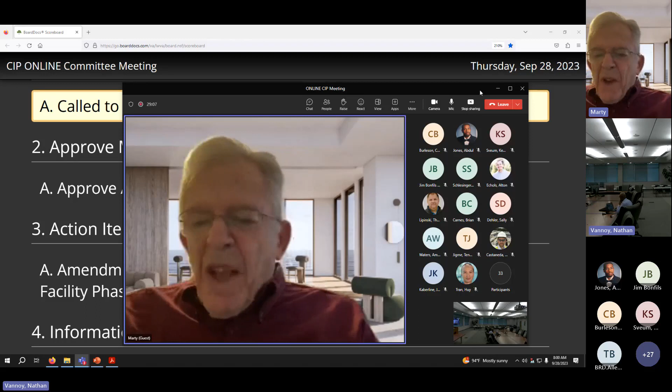The Loudoun Water Board is meeting today by electronic means pursuant to Virginia Code Paragraph 2.2-3708.2A3. Public notice and meeting access information was provided on the Loudoun Water website. A recording of the meeting is available from the board secretary. Future meetings will be in person unless indicated otherwise in the public notice. Board members wishing to speak are reminded to press unmute and identify themselves by name so that staff can accurately capture comments. The board secretary will now take a roll call attendance of the members.

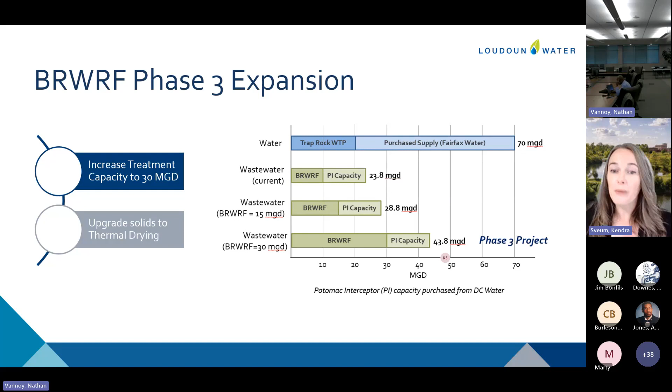But also with this work, we made the decision to advance our solids treatment on site and upgrade to thermal drying. This is going to produce a higher quality biosolids product from Broad Run. It will reduce the quantity of biosolids that leave the facility, and will help prepare us for future regulations that may come.

In terms of scale, this is large work. It's more area than we originally disturbed to build the plant, so it's still a major undertaking. The work on this first construction package was approved by the board early last year and is already working through design.

So construction package 2 is our most time critical package. This is to come in and to increase our solids treatment capacity, both in our secondary treatment and our biosolids. And that's what we're going to be talking about starting the design for today.

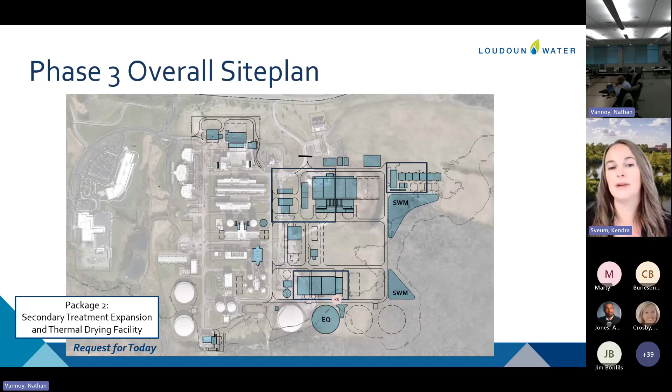The last part of the overall phase 3 expansion will be our construction package 3, which moves back to the existing part of the plant in light blue and will expand overall treatment capacity to 20 MGD. Then the fourth treatment package comes back, does much more heavy infrastructure to get the overall site up to 30.

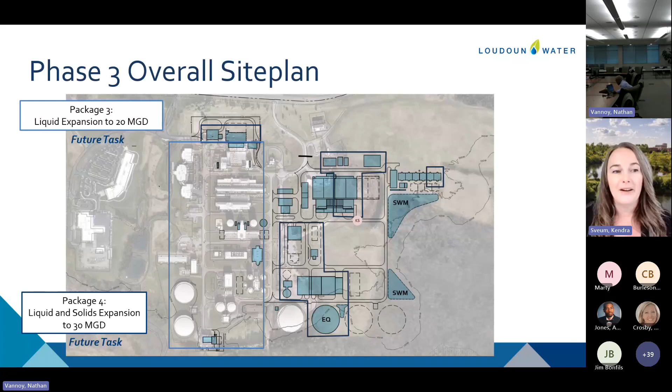When we look at our program schedule overall, this work is going to take place over the next 10 years. And when we did our initial planning, we designed these construction packages to be individualized work in areas to optimize what was time critical and to be able to give us the ability to adapt moving forward if regulation changes come, if growth in the county might look differently in 2035 than it does now. It gives us the ability to adapt as we go along when we're making these large infrastructure changes.

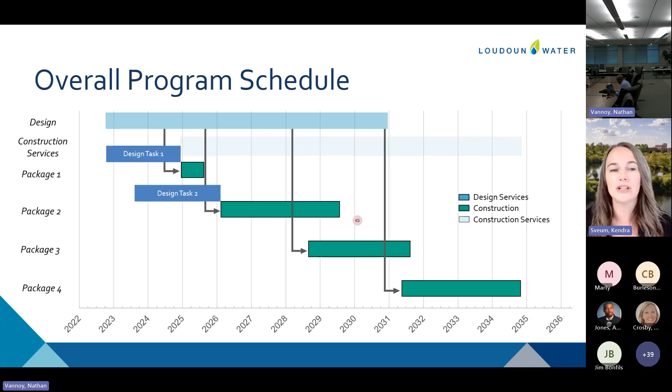So as we've mentioned before, the overall project budget is $650 million. This was developed as a parametric estimate. So that means we looked at a typical cost for 15 million gallons of membrane technology or a 30 MGD thermal drying facility. So it was really just a scaled cost to get us an overall target.

And we knew that with this cost, this is going to be one of the largest capital undertakings that Loudoun Water has completed. And so we put some strategies in place to help us manage this large budget, one of which was the phasing of these construction packages to help us adapt as we move forward and to be able to manage cost as the market changes.

We're also utilizing third-party cost estimators so that we have a verification of the cost estimates that are being prepared by our design engineer. We are also monitoring the metrics for similar projects within Loudoun Water, other large infrastructure like the Potomac Water Supply, but also within the industry. There's a lot of thermal drying facilities being built right now. So we can look at their project costs relative to ours to make sure that the spending is in line with what other utilities are seeing.

So an update on where we are in this large timeline. We completed the planning at the end of 2022 and brought forward to the board what we wanted the phase 3 expansion to be. At that time, we requested to start the design on the site work because we needed to get out there early to get the site prepped. But we also needed to complete a basis of design report so that we could get our first line item cost estimate. It was important to move forward from that parametric budget to a real cost estimate for what we want to build at Loudoun Water. And we've completed that and want to start talking about those results today.

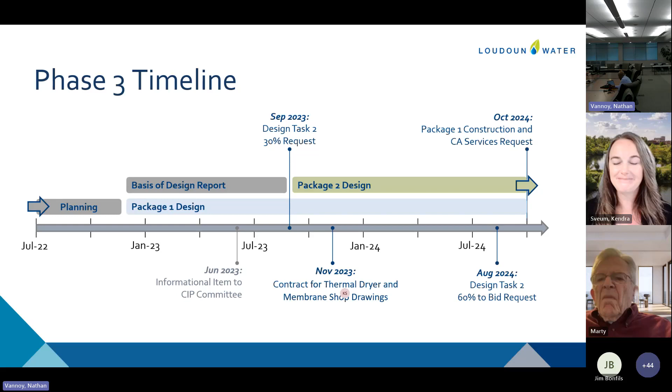So to move into the specific request today. I have a question. Yes. This may show my ignorance, I don't know. You're increasing thermal drying, but you're not increasing digestion capacity. Are they related or am I off base?

So absolutely. Don't have a process flow diagram to back up to, but that's okay. So what thermal drying does is it actually replaces the need to even digest the biosolids. We will still use our digesters, but we will use it only for primary sludge. Right now, we're using that digestion to meet our permit requirements. The thermal dryer will now do that.

And that was part of what we evaluated in the planning phase. We could have built more digesters and stayed at a Class B biosolids, but the ability to replace that treatment process with the thermal dryer and get a higher quality biosolids out of it really improved the cost benefit of what we were getting. So we aren't building more digesters because the thermal dryer replaces that need.

So those solids go directly to thermal drying and bypass the digestion? A portion of them will. We do still want to digest some of the solids because we want to get the biogas out of them, and we reuse that biogas as an energy source within the plant. So we're just strategic about it, and we just digest the solids that have the gas value in it.

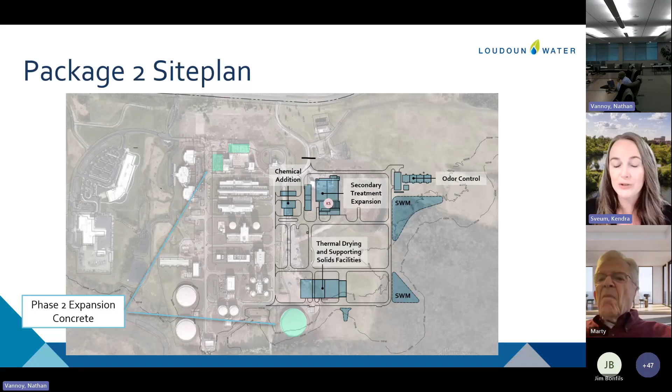So we feel like in pictures, it can sometimes be hard to grasp the scale of what we're talking about, but this is major infrastructure that we are going to be putting in, and very large buildings and structures, but it's the heart of treatment in Broad Run, and it's an important investment in getting more capacity on the site.

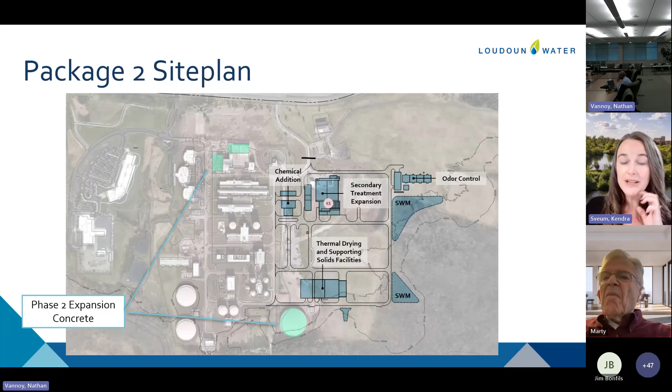So when we completed the BODR, we received our first real cost estimate on the package 2 construction. And this cost came in at a midpoint estimate of $384 million. Now, this is still a very early estimate for construction cost estimating. So we've shown the plus or minus that this estimate could range in, because things will continue to change as we move through design, and design will take about 2 years.

And I'm sure, as you are all aware, with the high level of market variability we're seeing right now, there is a lot of contingency built into this estimate about where escalation might go through our 2 years of design and 4 years of construction, and about where individual commodity pricing might be at the time we actually bid this.

So the wide range for this estimate is the project could come in between 300 million and 600 million, but we will continue to update this estimate as we move through design, which will take place in 2024 and 2025. It gives us the ability to continue to monitor the market.

We did do our third-party cost estimate on this number, and that third-party estimate did really verify that we are capturing some good safety factors, and the market volatility is accounted for well in this level of cost estimate with the range we're showing. So it's just going to be important that we all keep in mind our 300 to 600 range. This number will move around as time goes by.

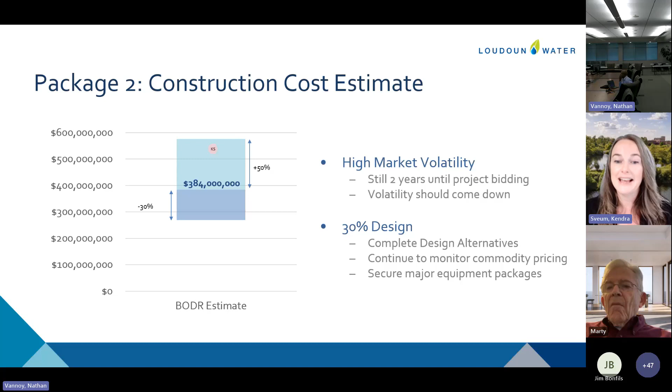So we anticipate a 9-month schedule to get through 30%. This is going to give us time to do a preliminary engineering report, which will complete those last alternatives that need to be evaluated and really finalize the scope of what we want in this package and what will be deferred into package 3 or 4. We will develop 30% design plans and specifications and begin the permitting process.

So the movement to a thermal dryer is going to require modifications to our current air permit, as well as our VPDES discharge permit. So we want to start that process early. We've got a good idea of what needs to be done. It just takes time to work through those processes. So starting this 30% design, getting everything nailed down, allows us to start permitting early, so that that doesn't delay the overall construction of the project.

So August 2024 is the general timeframe when we should be back, and we will then be asking for the amendment for the complete design once we've got the firm scope on this design package. So our fee for the consultant on the 30% is $5,945,000. That's broken down into project management, our preliminary engineering report, the design plans and specifications, and permitting.

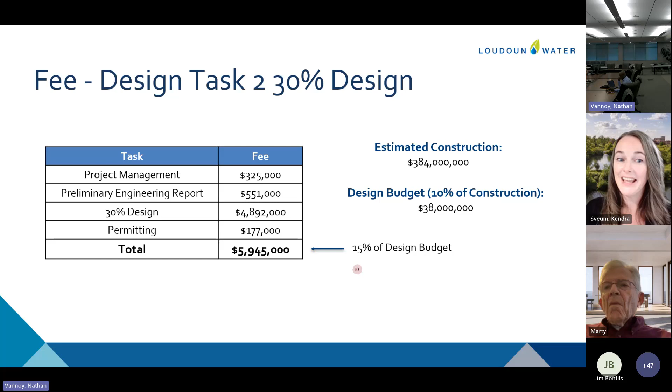And really at this point, we're going to start getting economies of scale because this design project is so large and we're building very large tanks. We will see some of these percentages come down over time as part of the design. So this is a very reasonable design fee for the level of what we're looking at. And what we're here to request today is the amendment for this fee. And so that moves me into the recommended motion today, unless there are any other questions.

Hi, this is Keith. I do have a question. When you mentioned the parametric cost estimation to determine a 650 million budget, could you just explain that a little bit more? I'm just trying to understand it. Is that primarily based on known facts and you're extrapolating those known facts? I was just curious, what are some of the key known drivers for that extrapolation? When we were developing that fee, we were in the planning stages.

And if I move back, just to give us a visual, because I like my visuals here. When we did our overall plan, we just knew that we needed 15 million gallons of BRBs and membranes. We didn't have drawings of it or a site plan. So we weren't able to go to a cost estimator and say, give me a line item cost estimate. So what we looked at that time was, well, we have our own BRBs and membranes. And we said, well, how much did it cost to build this 15 MGD of capacity?

So those costs came from 2008 and 2020. So we took those costs, we scaled them up to 2021 dollars at the time and got a parametric value and said, we spent so many million dollars per MGD of flow to get that. For the thermal drying facility, we didn't have a frame of reference because Loudoun Water's never done that. So our design engineer looked at similar size projects and said, well, there's a lot of thermal drying facilities in Georgia right now. So the last one built in Georgia, they spent X number of dollars per MGD of capacity, and we scaled it up like that. Because we didn't have enough detail on the design of the facilities to get any better estimate at that point.

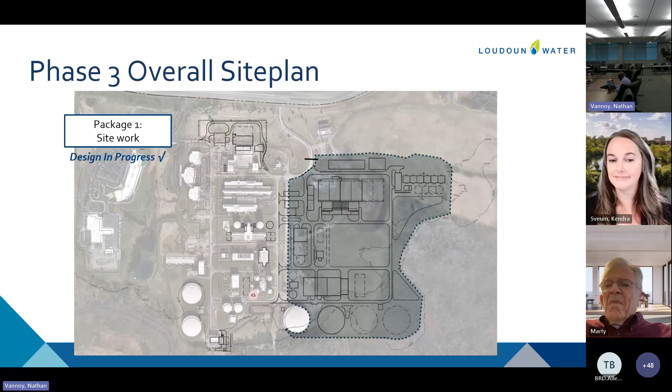And so one thing that I did want to mention, sorry, my mouse is very sensitive. There we go. On this overall budget, as we bid each of these construction packages, it gives us a chance to come back and update that budget. And really, that's our best time to see how the market is responding as we bid out. When we bid construction package 1, we can update the budget. When we get our bid on construction package 2, another good time to update the budget. And that's how we really plan to utilize these phased contracts to say, what is still in the budget? Does the budget need to be adjusted over time? We've got a good ability to monitor this as we move forward and make smart decisions versus just trying to move forward with the whole program at once. It would have been really difficult to try to manage costs.

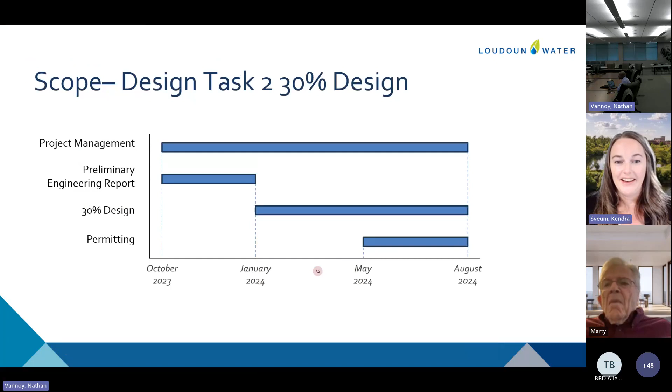Whoops, I busted out of the presentation, sorry.

All right, so at this time, we have the recommended motion for this amendment. I'll read the recommended motion, but I think we need a discussion after I read it to see whether we want to go consent or action. I move the board authorize the general manager to execute an amendment to the professional services contract with Hazen and Sawyer for the Broad Run Water Reclamation Facility Phase 3 expansion project for design task 2, 30% design, with an estimated not to exceed cost of

$5,945,000 and authorize an approximate 5% contingency to be controlled by the general manager for a total authorized budget not to exceed $6,242,000. Additional costs will require board approval. Can I get a second? Yeah, this is Keith. I'll give a second. Why don't we vote on this and then we can discuss whether to go consent or action. Jewel, can you have a roll call?

Yes, sir. Mr. Sultan? Yes. Mr. Bonfils? Yes. Thank you. Mr. Moody? Yes. And Ms. Sirsikar? Yes. Thank you. Now, do we have any comments from committee members on whether to go action or consent? I would like to propose that we put this on an action item. So I think the board needs to discuss this further.

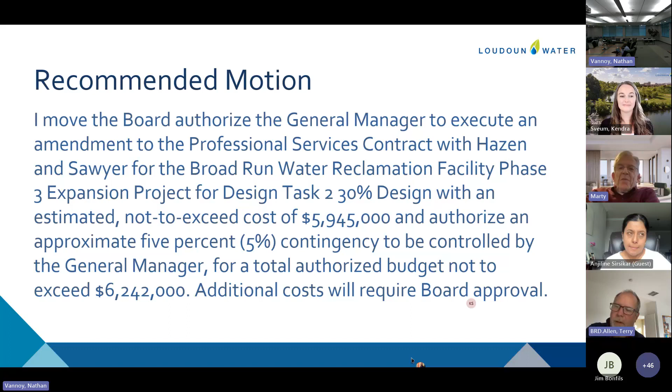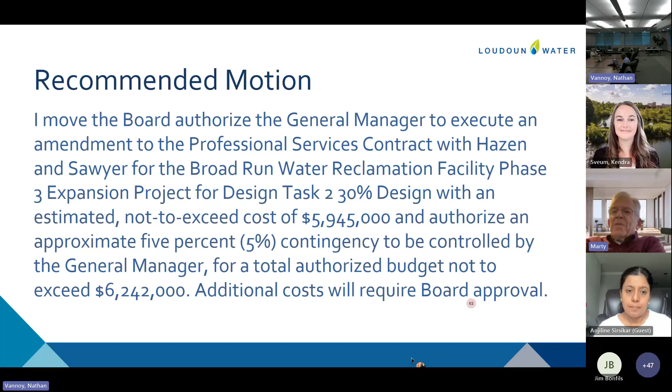No, I agree with you, Terry. I think sometimes it's a tough decision whether to go action or consent. But like was mentioned before, if you go consent, a board member can still ask for a presentation at the board meeting. Correct. Okay, let's go action item with this. And Kendra, thanks a lot. Again, excellent presentation, fascinating. All right, you're welcome.

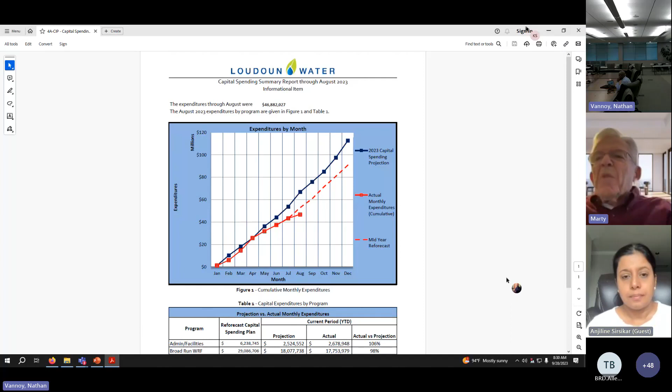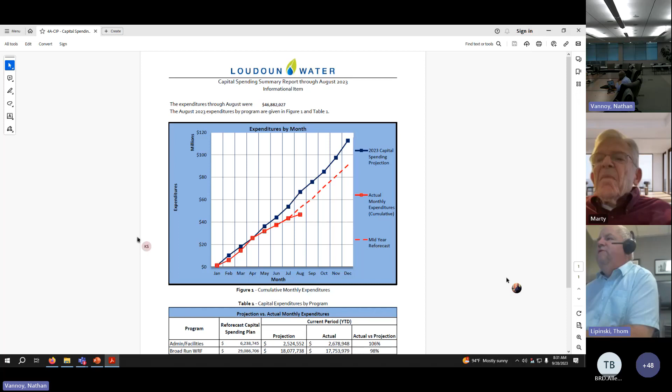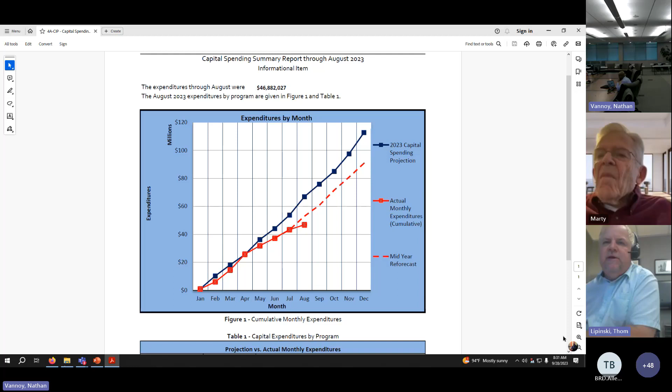Okay, the next item. I don't have the, oh, there we go. Capital spending report. Good morning. Not a whole lot to report here. This is spending through the end of August. And the total spending was $46.8 million, a little bit of a dip below the mid-year reforecast, and that's primarily due to spending in the finance program. That it's lagging by about $5 million. So I don't know if there's any specific questions, but I'd be happy to answer any I can.

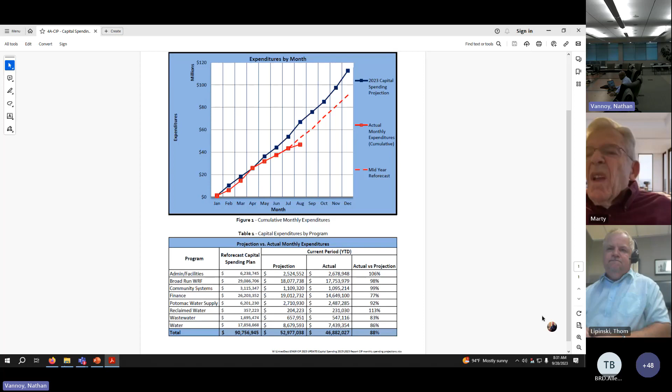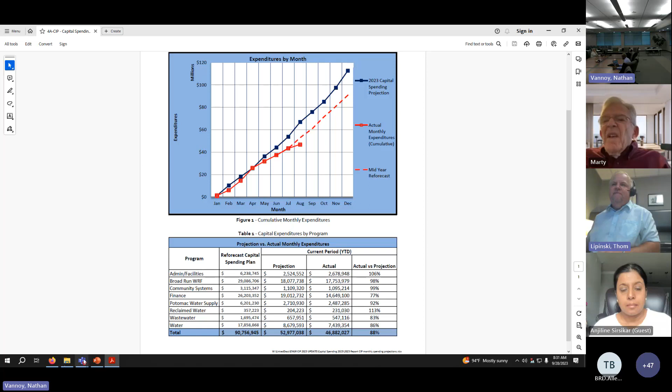I don't have any questions. Does anybody else have a question? This is Keith, no questions for me. Okay, well, thank you. Okay, let's see. It looks like there's nothing else on the agenda, at least on my screen. Let's see. So the next thing is the tentative agenda and then adjourn the meeting. Do I have a motion to adjourn?

I so move that we adjourn the meeting. This is Keith, I'll second. Roll call vote. Mr. Sultan? Yes. Mr. Bonfils? Yes. Mr. Moody? Yes. Ms. Sirsikar? Yes. Thank you. We are adjourned at 8:32 a.m.